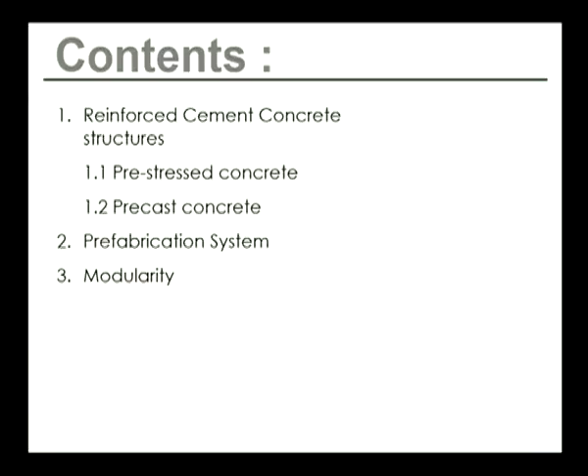So what are reinforced cement concrete structures? In my last lecture I described various structures made of different materials. Reinforced cement concrete structures are nothing but structures or structural elements made up of concrete, reinforced concrete.

For cement concrete structures, there is an important concept of pre-stressed concrete. Pre-stressed concrete is a method for overcoming concrete's natural weakness in tension. Like any other material, concrete has many weaknesses, and the most significant of all is its natural weakness in tension. When subjected to tension, it fails after a certain extent. So pre-stressing is done to overcome this weakness in tension.

It can be used to produce beams, floors or bridges with a longer span than is practical with ordinary reinforced concrete. There are two methods of introducing pre-stressing to concrete: one is pre-tensioning, the other is post-tensioning.

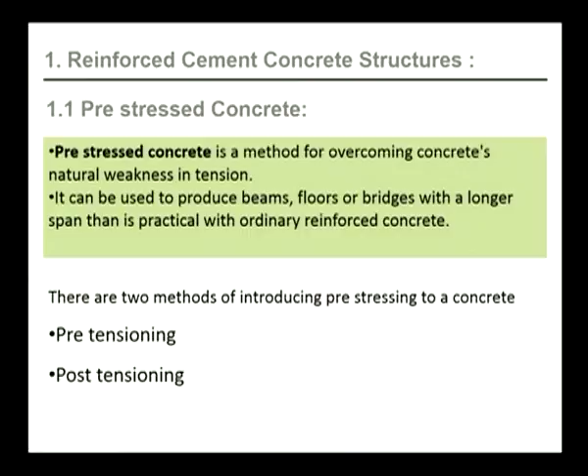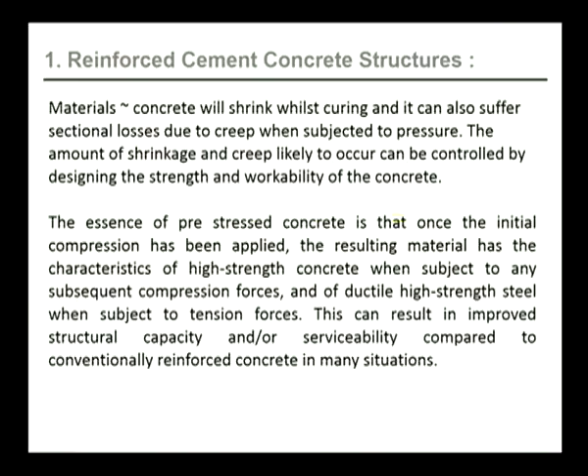Materials like concrete will shrink while curing and can also suffer sectional losses due to creep when subjected to pressure. The amount of shrinkage and creep likely to occur can be controlled by designing the strength and workability of the concrete. The essence of pre-stressed concrete is that once the initial compression has been applied, the resulting material has the characteristics of high strength concrete when subject to subsequent compression forces, and of ductile high strength steel when subject to tension forces.

This can result in improved structural capacity or serviceability compared to conventional reinforced concrete in many situations. How do we do pre-tensioning or post-tensioning? Basically with the help of tendons. Tendons can be defined as small diameter wires, 2 to 7 millimeters, in a plain, round, crimped or indented format. These wires may be individual or grouped to form cables. The two main advantages of strands are: first, a large pre-stressing force can be provided over a restricted area; and second, strand can be supplied in long flexible lengths capable of being stored on drums, saving site storage and fabrication space.

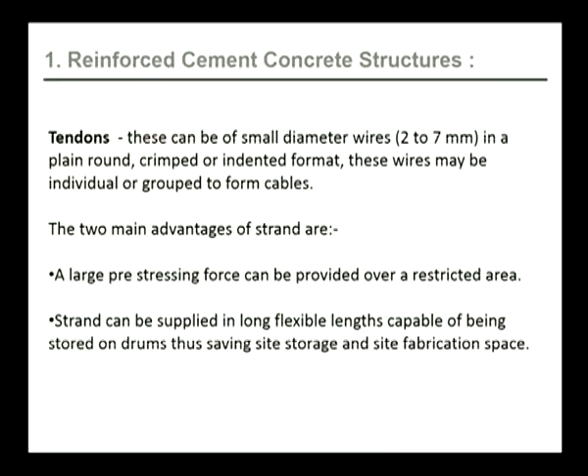As you can see in this slide, these are typical tendon formats. In this figure, we can see 12 numbers of 7 millimeter diameter wires stressed together, combined by a binding tape. This is also called a parallel lay cable. All these wires form a cable structure.

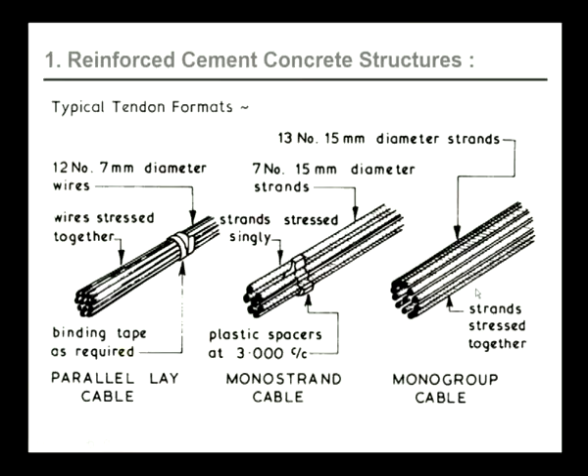Second is a monostrand cable. Here we use 15 millimeter diameter strands, 7 in number, stressed singly. This illustration shows a monogroup cable, with 13 numbers of 15 millimeter diameter strands stressed together. These are strands, and the collection of these cables make tendons, which help us in pre-tensioning or post-tensioning.

Next is the concept of pre-tensioned concrete. Pre-tensioned concrete is a variant of pre-stressed concrete where the tendons are tensioned prior to the concrete being cast. The concrete bonds to the tendon as it cures, following which the end anchoring of the tendons is released and the tendon tension forces are transferred to the concrete as compression by static friction.

In this illustration, you can see a tendon joined at two ends. At the other end we see a hydraulic jack, which gives tension forces to the tendons. In pre-tension concrete, the basic intent is to put these strands together and apply tension from one side, stretching them, and after that pour concrete over it. As the strands are stretched, the concrete is cast around the stretched wires, and we can use dividing plates or spacers as required.

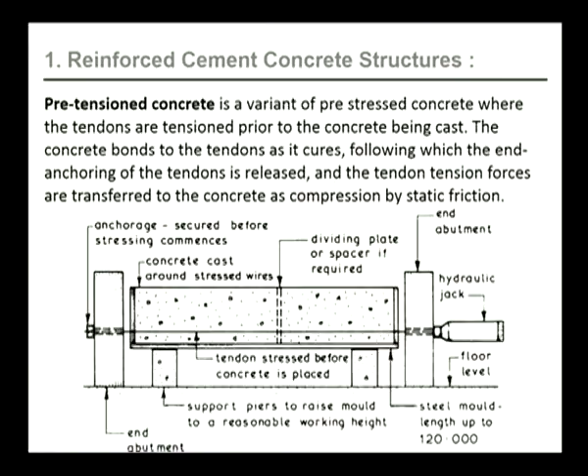In this case, the hydraulic jack gives tension forces to the tendons and stretches it, with anchoring done at the other end. This is a typical example of how we do pre-tensioning.

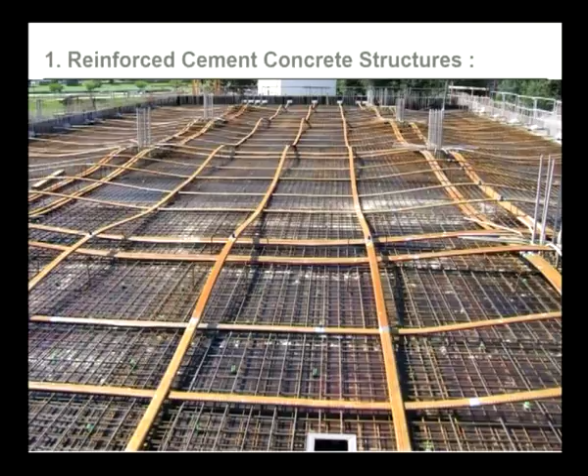This is a pre-tension slab casting picture. Here we can see the tendons are stretched at both ends: one side is fixed and the other side is pulled, stretched and properly formed, and then concrete is poured over it, thus forming pre-tensioned concrete. Now coming to the concept of post-tensioned concrete.

Post-tensioned concrete is a variant of pre-stressed concrete where the tendons are tensioned after the surrounding concrete structure has been cast. The stressing is carried out after the concrete has cured by means of hydraulic jacks operated from one or both ends of the member.

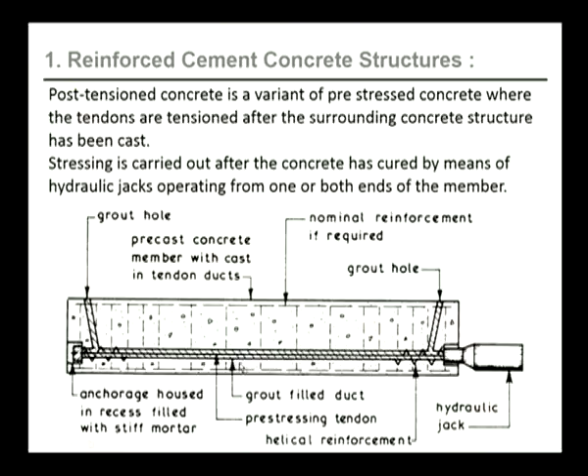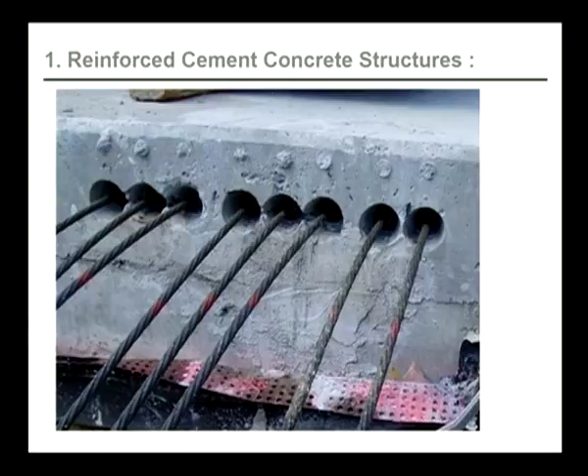In this case, we see a concrete element with a strand passing through it. This strand is put inside the concrete element. After casting and placing the concrete, we tension these strands either from both sides or from one end. We can see the anchorage housed in a recess filled with stiff mortar on this side, a hydraulic jack on this side, a grout filled duct, and the pre-stressing tendon helical reinforcement. This is a typical illustration of how a post-tensioned concrete structure looks during erection.

These are the typical anchorage details for the tendons. This is a male cone driven into the female cone, and the tensile steel spiral to hole that holds it together. This is the reinforced concrete female cone cast into the end of the concrete member, as explained earlier. This is called the grout hole, as shown in the earlier illustrations.

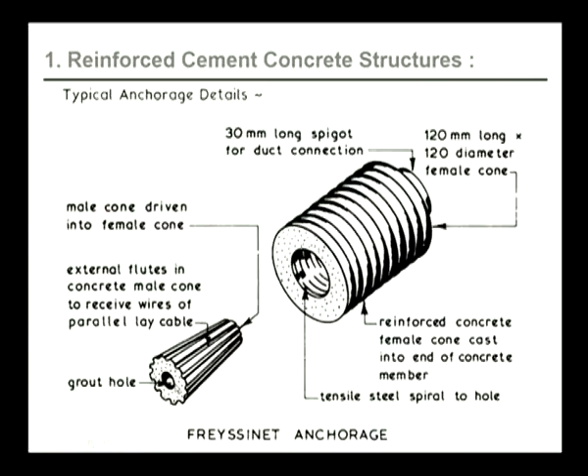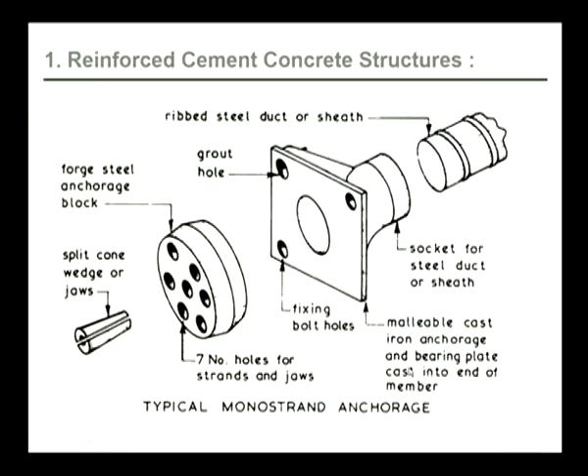This is a forged steel anchorage block. These are the holes to support and take the tendons in — the 7 number holes for strands and jaws. These are the fixing holes. This is a socket for the steel duct, also called a sheath. This is a malleable cast iron anchorage and bearing plate cast into the end member, and these are the grout holes, as explained earlier.

The comparison of pre-stressed concrete with reinforced structures: when comparing pre-stressed concrete with conventional reinforced concrete structures, the main advantages and disadvantages can be enumerated, but in the final analysis, each structure and component must be decided on its own merit.

The main advantages: 1) it makes full use of the inherent compressive strength of concrete; 2) it makes full use of the special alloy steels used to form pre-stressing tendons; 3) it eliminates tension cracks, reducing the risk of corrosion of steel components; 4) it reduces shear stress; 5) for any given span and loading condition, a smaller cross section can be used, giving a reduction in weight; 6) individual precast concrete units can be joined together to form a composite member.

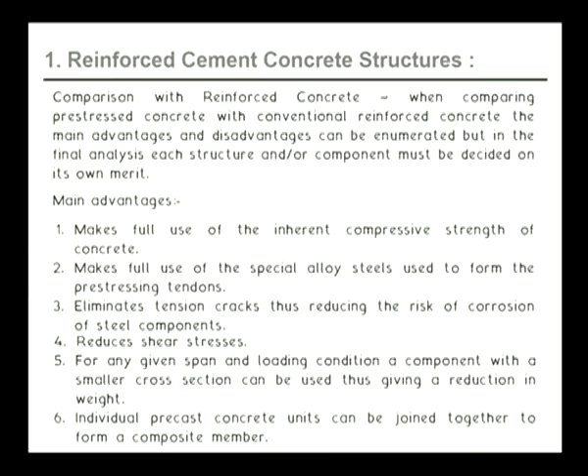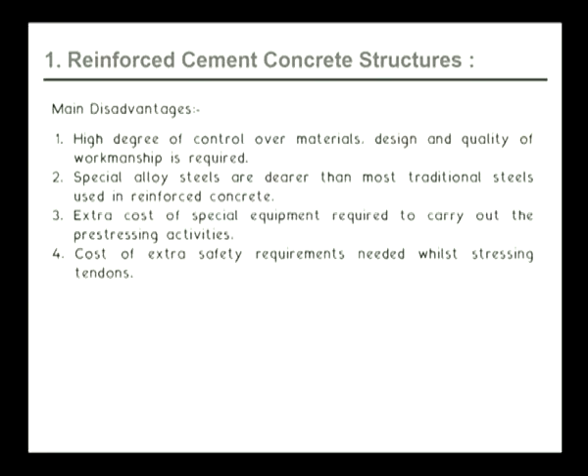There are disadvantages also. The main disadvantages are: 1) a high degree of control over materials is required, so design and quality of workmanship is required to a great deal; 2) the special alloy steels are dearer than most traditional steels used in reinforced concrete; 3) extra cost of special equipment is required to carry out the pre-stressing activities; and 4) cost of extra safety requirements are needed while stressing the tendons.

As a general comparison between the two structural options, it is usually found that up to 6 meter span, traditional reinforced concrete is the most economical method. For spans between 6 and 9 meters, the two cost options are somewhat comparable. But for spans over 9 meters, pre-stressed concrete is definitely more economical, since the span is too high — it's always better to apply pre-stressed concrete there. It should be noted that generally columns and walls do not need pre-stressing, but in tall columns and high retaining walls where bending stresses are high, pre-stressing techniques can sometimes be economically applied.

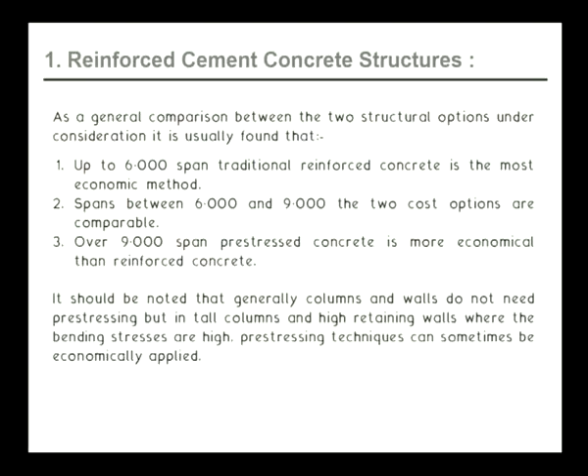Coming to the next section: precast concrete. Precast concrete is a construction product produced by casting concrete in a reusable mold or form, which is then cured in a controlled environment. These structures are molded to a particular shape, then transported to the construction site and lifted into place. In contrast, standard concrete is poured into site-specific forms and cured on site.

So the basic idea is that there is an assembly line with molds — we pour concrete into the molds, cure it at some other location, transport the particular form of concrete to the site, and lift and place it as required.

Why do we use precast concrete? First, precast concrete structures are very comfortable. The material has intrinsic properties of thermal inertia, allowing a more constant temperature both in cold and hot regions, as well as acoustic insulation. So we can actually control how much it will expand and contract depending on the location where the structure is built.

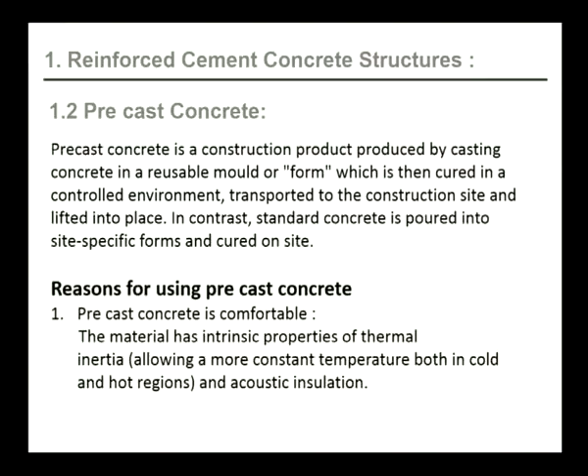Secondly, precast concrete is safe. Not only is structural stability maintained for longer periods, but concrete construction prevents the spread of fire from one building to another. It is sufficiently strong to resist impacts, blasts, and natural catastrophes like earthquakes, tornadoes, and floods.

Precast concrete is versatile — factory production allows a wide choice of surface finishing, color range, and special shapes. Its moldability entails designers to copy classic details like keystones and capitals, or match the finish of materials like weathered stones, etc. The precast concrete industry can source a wide range of aggregates locally and offer a tremendous variety of colors and visual effects.

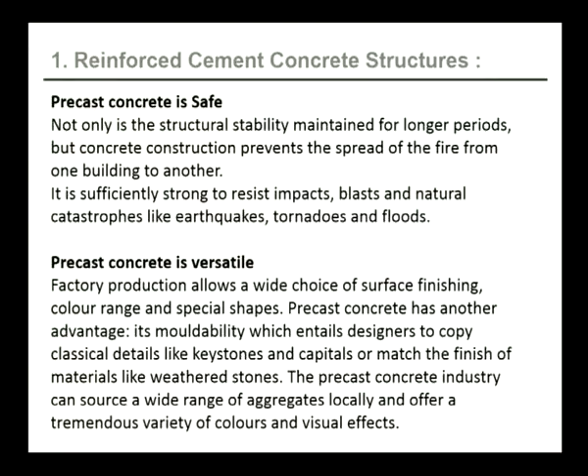Precast concrete is very useful for designers. We can use the surfaces we want, the textures we want, the colors we want, and we can have applications at various locations, not only as a structural member but also as a finishing material. Precast concrete is healthy.

In today's case, indoor air quality is a prime concern for all of us. Precast concrete is stable throughout its life and does not need chemical treatment to protect it against rot and insect attack, meaning there are no emissions in the internal environment at all.

Precast concrete is optimized. Advanced technologies used in precast plants create an improved quality product, that is, reduced tolerances, thinner sections, and engineered solutions compared with cast-on-site concrete. What happens at site, when we do cast-in-situ construction, is that in most cases, due to workmanship error, we do not get finished edges.

Precast concrete is useful for that. Plus, precast concrete undergoes a lot of quality checking before it reaches the site, so it's always a boon to use precast concrete for various applications.

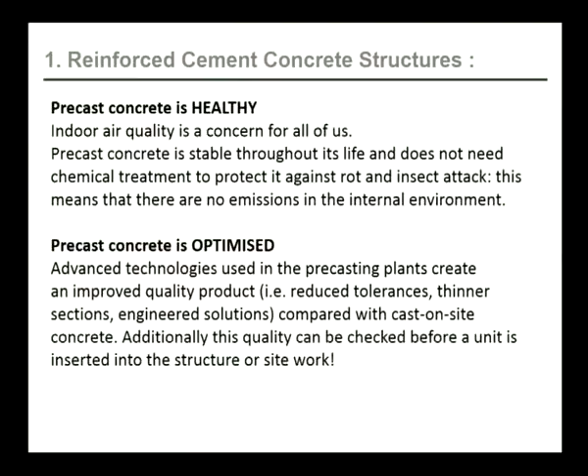Precast concrete is durable. We all know that concrete lasts for years. Egyptians and Chinese people used an ancient form of concrete for buildings and structures that still exist today. Concrete is used where structural stability has to be maintained for long periods.

Effective design detailing helps to lengthen the life of a concrete building. Precast manufacturers can offer guidance on designing for durability.

Precast concrete is ecological. Precast concrete is made up of natural raw materials, such as stones, gravels, sand, cement, etc., which are locally available almost everywhere and in enormous quantity.

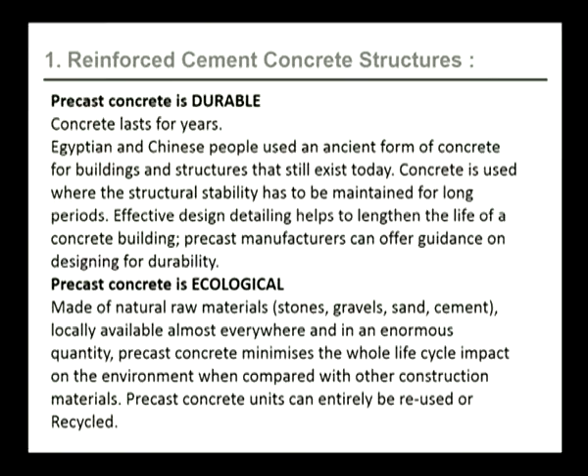Precast concrete minimizes the whole life cycle impact on the environment when compared with other construction, because precast concrete units can entirely be reused or recycled.

Precast concrete is fast. The top floor of a skyscraper, for example, can be cast in the factory when the foundations have not yet been started.

In a typical construction for a skyscraper, going from foundation to the top floor will take ages, whereas in precast construction, while the foundation is still on site, we can cast the floor in some factory and bring it to the site, placing it as and where we want. But the project requirements of modern construction prefer a just-in-time delivery.

On-site construction using precast concrete is not only faster but also safer, as secure working platforms are quickly established.

Precast concrete is also affordable. It combines the excellent quality of factory production with a relatively inexpensive material. The costs of repairing and maintaining a concrete structure are highly limited. Therefore, there's no need to compromise on quality to reduce costs; simply choose the best way to use locally available resources.

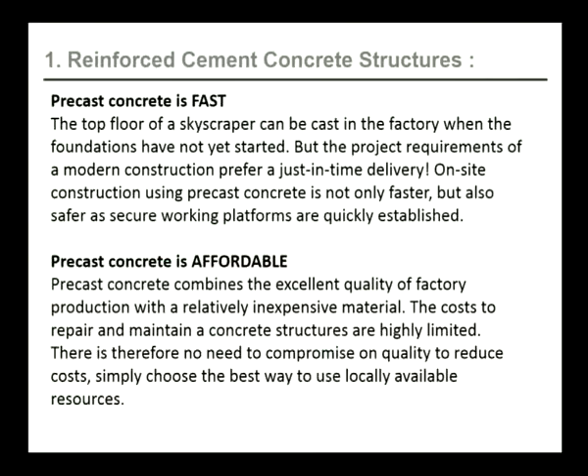Precast concrete is also sustainable. Sustainable means a three-win situation for the three pillars of society: people, profit, and the planet. If only one of these elements is negative, the solution can't be considered sustainable.

Here in this illustration, I bring you examples of precast concrete. In this figure, you can see a section of the staircase which is completely precast in a factory, brought to site and assembled. On the right, you see a picture of a factory which does precast modules for construction. These are all precast modules with holes or insertions which are brought to site and inserted wherever required, using a male-female joint concept.

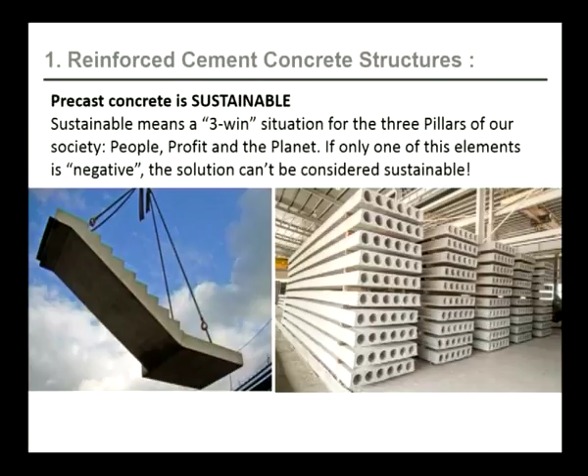We can transport these modules to site and fit them into the applicable spaces as and when required. This is a prefabrication system. Prefabrication is the practice of assembling components of a structure in a factory or other manufacturing site and transporting complete assemblies or sub-assemblies to the construction site where the structure is to be located.

I just spoke about precast concrete. Prefabrication is an extension of precast concrete. What I explained about the precast concrete system, prefabrication is an extensive combination of those precast elements. For example, to summarize the entire concept...

If I have to make a house, what I do is, in a factory or warehouse, I assemble maybe half, full, or 25% of a house, including staircases, walls, doors, floor slabs, and roof slabs, and then transport the entire unit to the site and fix it as per the site conditions.

The salient features of this construction technique: the assembly of buildings or their components can be done at a location other than the building site. This method controls construction costs by reducing time, wages and materials.

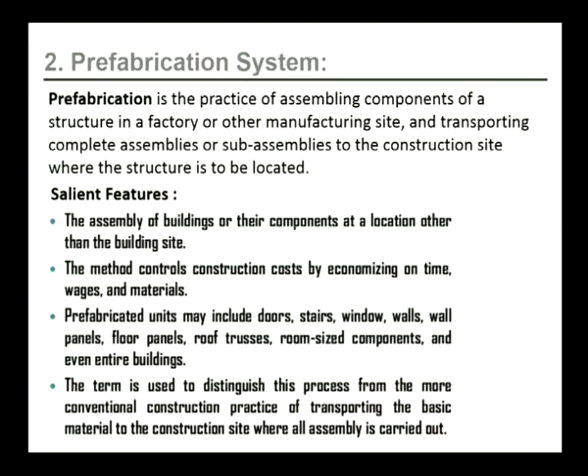Prefabricated units may include doors, stairs, windows, walls, wall panels, floor panels, roof trusses, room sized components and even entire buildings. The term prefabrication is used to distinguish this process from more conventional construction practices of transporting the basic material to the construction site where all the assembly is carried out.

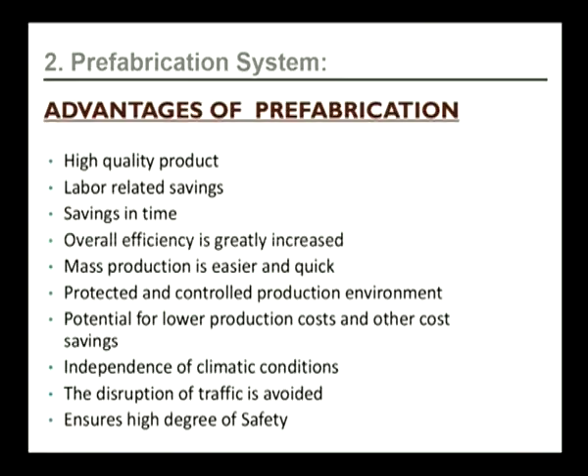Advantages of the prefabrication system: first, we get a high quality product without any error. Second, we get considerable savings related to labor costs. Third, we get savings in time. Fourth, overall efficiency is greatly increased. Fifth, mass production is easier and quicker, with a protected and controlled production environment. Next, there is potential for lower production costs and other cost savings. It is independent of climatic conditions, disruption of traffic is avoided, and it ensures a high degree of safety.

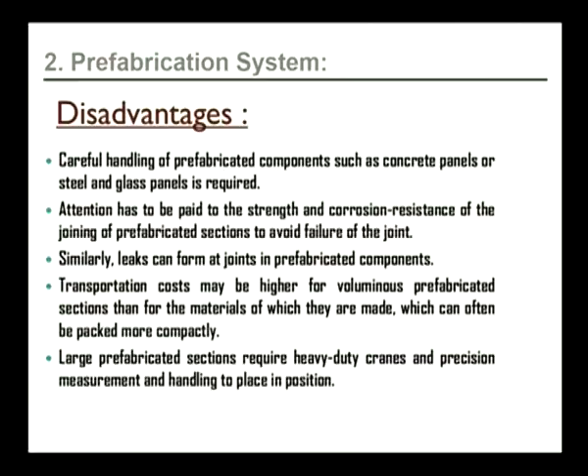Disadvantages of the prefabrication system: we have to carefully handle prefabricated components such as concrete, steel or glass panels when transporting them from the factory or warehouse to the site. Attention has to be paid to the strength and corrosion resistance of the joining of prefabricated sections to avoid failure of the joint. The joints, once placed at certain points, must also be watertight. All this requires a lot of attention and detail, since leaks can form at joints in prefabricated components.

Transportation costs may be higher for voluminous prefabricated sections than for the materials of which they are made. For example, concrete might be easier to transport than giant sections such as a huge RC girder for a bridge. Large prefabricated sections require heavy duty cranes, as I just explained, along with precision measurements and handling to place them in position, because nowadays we even use GPS systems to construct metro lines, metro girders, and bridges. So we require a high degree of precision to prefabricate such concrete members.

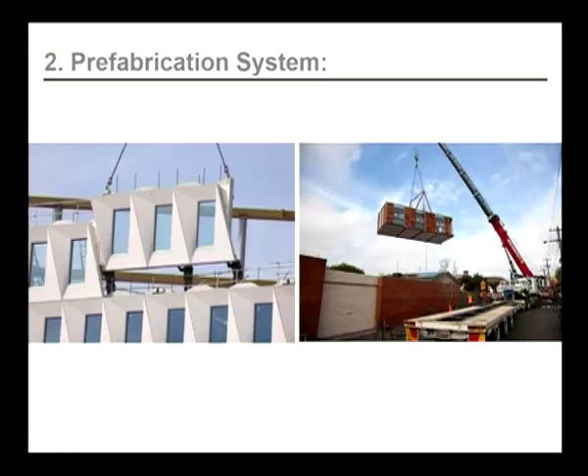In the right illustration, you can see an entire part of a floor getting prefabricated, brought to site by a heavy duty vehicle, lifted by a heavy duty crane, and put into place.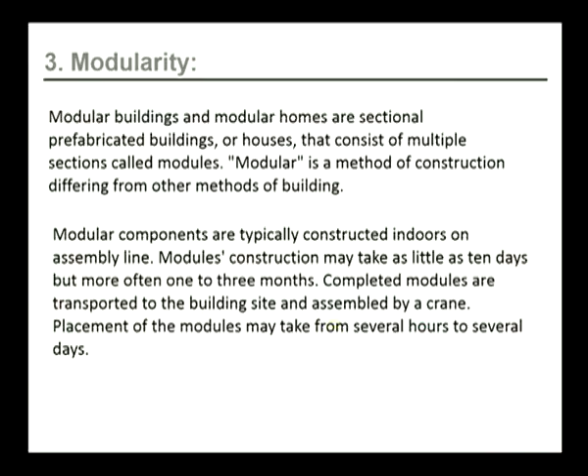The concept of modularity: what are modular buildings? Modular buildings and modular homes are sectional prefabricated buildings or houses that consist of multiple sections called modules. Modular construction differs from other methods of building, like the conventional ones. Modular components are typically constructed indoors on an assembly line. Module construction may take as little as 10 days, but more often 1 to 3 months. Completed modules are then transported to the building site and assembled by a crane, with placement taking from several hours to several days.

As I explained with the prefabrication system, modularity is just an extension of it. In modular buildings, for example, an entire floor or an entire building is prefabricated, brought to site, and then constructed or placed into position.

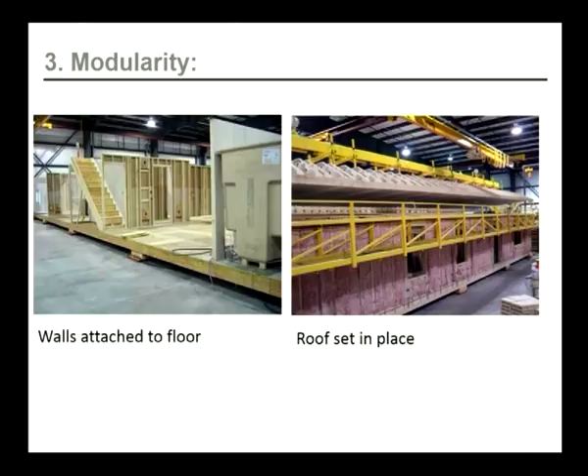When doing modular buildings, construction is just a repetition of these modules. These modules are fixed and prefabricated with a certain set of dimensions. In construction, we have a repetition of this. For example, if a module has a square feet area of x, at the site we will have a multiple such as 2x or 4x. So it is always a repetition of these modules.

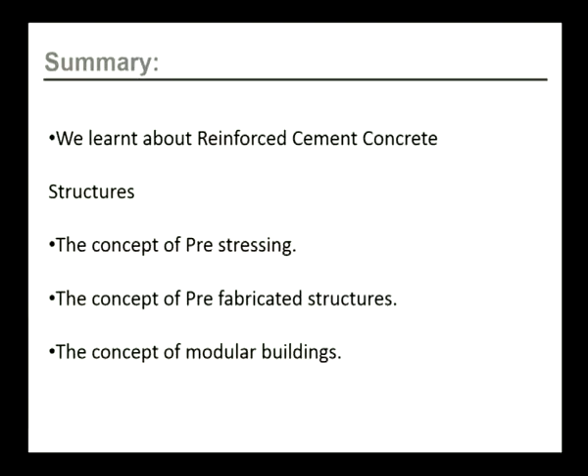To summarize the entire lecture: first, we learnt about reinforced cement concrete structures. We also learnt about the concept of pre-stressing, including pre-tensioning and post-tensioning. We learnt about strands and tendons, and how pre-tensioning and post-tensioning stabilize and reduce weakness in concrete. We understood the concept of prefabricated structures, and also the concept of modular buildings and their importance in the construction industry.

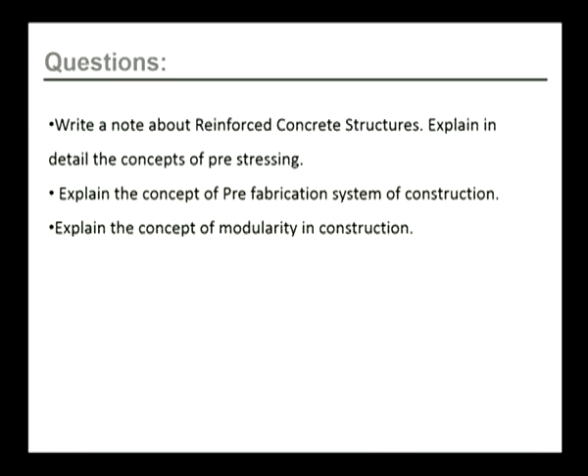The questions: write a note about reinforced cement concrete structures; explain in detail the concept of pre-stressing; explain the concept of the prefabrication system of construction; explain the concept of modularity in construction. Thank you.